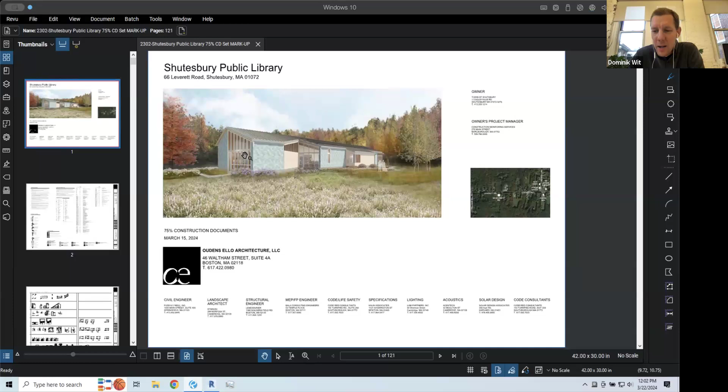Just to quickly update you, there has been some architectural progress since last Friday. So what I've rolled into this set is revisions, because it was a 75% set. I think what I have for you today is 80%. There's been some follow-up cleanup. Always as things get to that deadline, there's a few little oversights and cleanups. So I want to present to you a week's worth of revision, since that was 75%, at least for architectural.

That does include an updated rendering on this first page. So this now represents the intent to finish the building without the rafter tails. It's important that we represent the building correctly as things change. The front end of the code and ADA clearances has not changed.

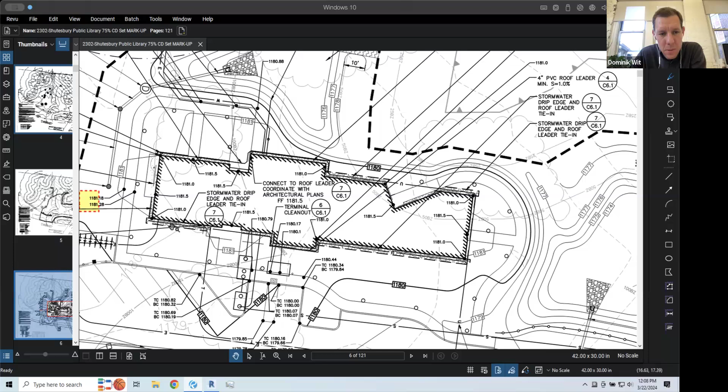So all of that is connecting to this - what is that? That's a drain hole, manhole. And then it goes into this catchment basin here.

Similarly, this upper catchment basin collects some of the water that's uphill and discharges here at this riprap. This is an overflow spillway in case anything here fails, so that's a fail-safe for this system. Similarly here, if anything fails within this, we have a spillway. Otherwise, we'll continue the stormwater collection into this lower basin.

Septic we can get to, we have specific drawings for that. This is a raised septic system.

If we go to utilities, we've got a duct bank that comes in, leads all the way to the transformer. We also have telecom data, currently shown going to the storage room. After last-minute coordination with Marianne and her IT consultant, we decided it might actually be easier to control wiring within the building if we get telecom coming into the director's office. So this is a portion of scope we're going to revise for the 100%.

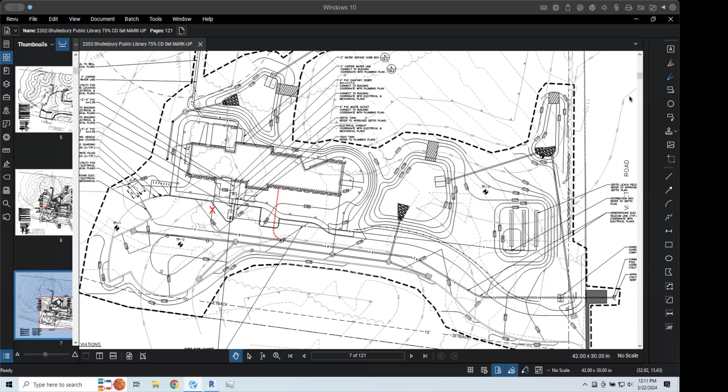I think it's a 2-inch, but I'm going to look while we're talking, let me follow up. I may be completely misquoting. All right, I'll look and then I'll chime in again. Neil at CMS recommended that we have an additional one, and I think that's appropriate, so you're ready in case you have additional needs in the future.

We're pushing on NGrid so that they can have their pricing for the overhead power lines, so that we can have that in hand when we evaluate the pricing for the 75%. So that's another kind of sidetrack happening while we're pricing the set related to utilities.

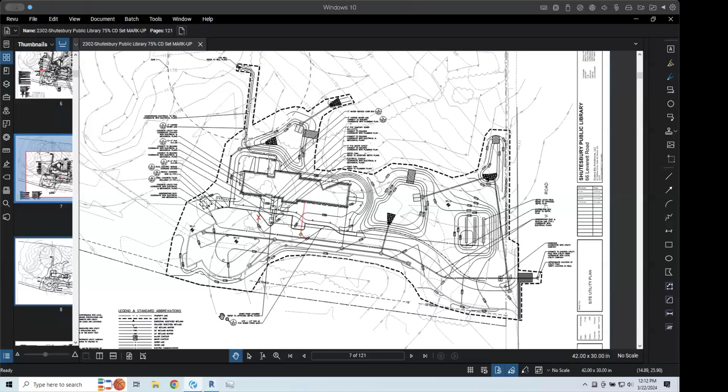So I just checked with Marianne again, and it is the broadband specifications from our broadband committee, Jeff and Stephen. It does say at least a 1-inch conduit, but that's for one cord. You have all the specifications I sent - if Jeff thinks a 2-inch conduit is better, that doesn't seem like it would be a huge price difference. So I'll make that change, Jeff, to a slightly bigger one - from your experience, let's do that, and we wouldn't want to be caught out with that. So I'll make sure to include that, that's great.

Moving on to pavement markings. This is a fairly simple plan that really just describes pavement markings and signage. All the lane markings and parking aisles are shown here, with arrows. Required signage just to help direct traffic around, that's required.

Accessible parking designations - we show two of the EV charging spots for this. I've asked, this didn't make it into the 75%, but I've asked that they omit that for the base bid. We don't need it, right, because we're going to be charging-ready. We don't need the signs yet, so I'm going to make sure they get taken off. Fairly straightforward on this one.

Moving ahead, so now we get into details. I didn't want to get too bogged down on these, I'm happy to answer questions for those who have them. One thing I'm going to ask Fuss and O'Neill about is this electric charging setup - we need to be charging-ready, right? So we do need this concrete pad, this is 2 feet deep.

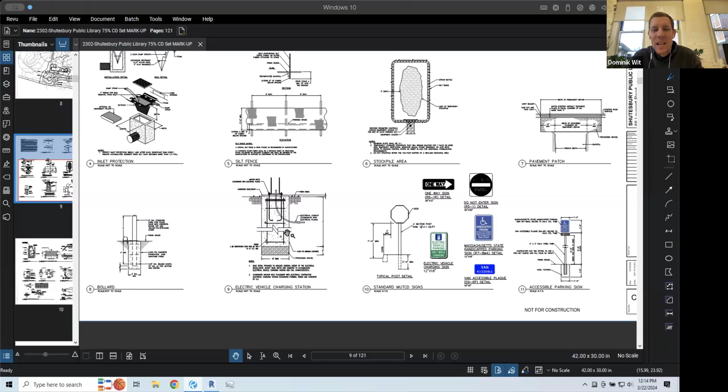On a previous job, we installed one about 5 years ago, and I'm trying to remember how deep we ended up having to go. I know there's frost heave considerations, but it's substantial. So this is one thing I want to flag - it's a lot of concrete there for a charging station. It very well could be over-engineered, but that's a personal question for me.

I'm going to reach out on that.

Pretty straightforward with everything else - spillway information, a lot of these catchment basins and other civil elements. Going into the landscape, there are also other landscape elements that we can go through as well.

Moving on then to the septic. So the leaching field again is as shown and coordinated. Sounds like everything is working well in the current location. Again, it's going to be about 7 feet tall if you stand on Leverett Road, so it's going to have a fair height to it. This will be seeded - we can go over the planting plan in the landscape.

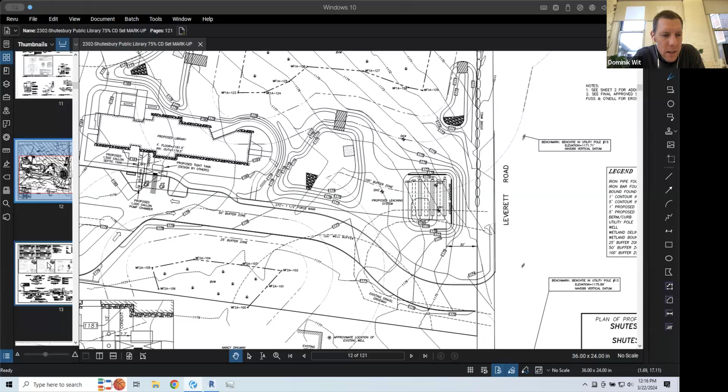This will be connected to the chambers up here, the septic tanks. We have 2 septic tanks - the septic tank and then the pump chamber.

We were struggling - there was a concerted coordination effort about where to locate these. I think they are shown more accurately in the civils, so that manhole access is properly located. The tight tank, which is plumbing not septic, needs to be in a location very close to this, unfortunately, and it has to do with elevation and drainage. We were hoping to move them upgrade, and that was problematic, so unfortunately they will have to be where they are. We are looking to conceal the access hatches within planting.

What is a tight tank? So a tight tank is basically a reservoir that will need to be maintained - you will need to have it serviced so that it's drained. It's basically catching water specifically from the mop sink, because that water is not allowed to go into the septic system. So the chemicals that you discharge in that mop sink are not allowed to go into the septic system.

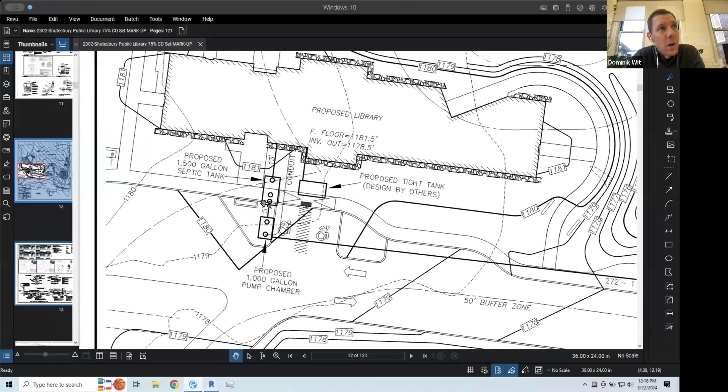So I haven't gotten any information on the maintenance requirements, like how often this reservoir will fill. I'm trying to remember, I had the dimensions of it - what you see here, it's actually cylindrical. I think there are details of that somewhere. Our plumbing engineer is actually still working on the exact size of that.

Okay, thank you. Yep. Can I interject real quick?

Sure. So Jeff, a lot of people at the lake have tight tanks. Basically it's just a reservoir - when it fills up to a certain level, there's an alarm that goes off, and then you get it pumped out. It's for when you can't have, at the lake, when you don't have the space for a drain field.

Okay, nice. Thanks, Stephen.

So we have the septic details here. We have some spacing plans for those elements, and then followed by details.

Looks like we are going to have a candy cane element in that raised septic, so it's something I want to discuss. Initially we had the septic field in the southwest portion of the site, and early on we were talking about how we might be able to disguise it. Now it's really front and center, and I'm just wondering - we do have some plantings in front of this, so I think that would be the strategy to help conceal this. But it's always that component of a septic leaching field - anybody who has one is familiar with it.

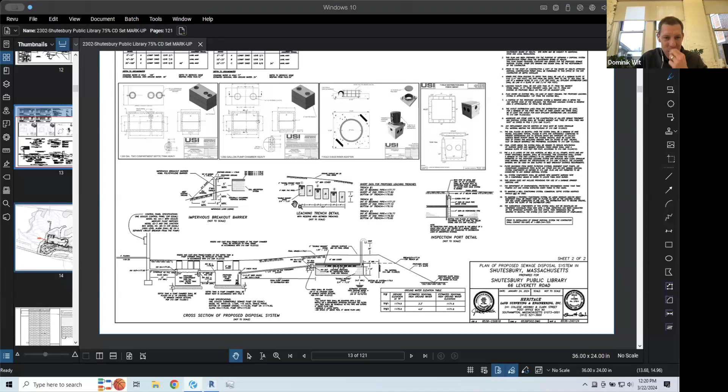All right, I'll talk to Fuss and O'Neill, and then Heritage, because obviously they would have a lot of insight on that as well. So thanks for that recommendation.

So moving to landscape - here we have our materials layout plan.

Nothing much has changed here. Again, the turnaround is revised now to meet the setback requirements. We do have overflow parking here.

One thing that slipped into this set that was new to me, and I'd like to potentially revise on a cost basis, is that we have a very low wood guardrail now. I don't know if anybody picked up on that. It's something I need to coordinate with Stimson. I'd like to do whatever is most cost beneficial. We did a similar strategy at the turnaround here where we would just use reclaimed boulders.

There's excavation going on the site, so whatever we find, we can have the contractor or the site contractor lay it out to help prevent vehicles from straying from the designated drive paths.

Similarly for this overflow parking, my sense looking at this is it's not going to be an insignificant amount of money as drawn. So it's not the same spec as what we had here originally. Originally here we had large foundations. I quickly looked at the detail, so just wanted to mention that. That's kind of on my radar.

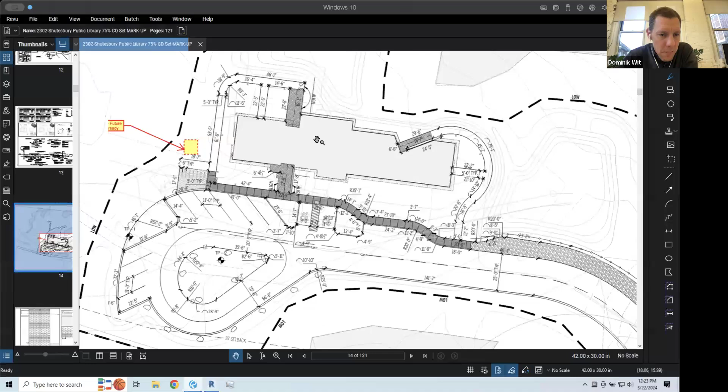So again, I think it depends on where we come in on the cost estimate. I know there was talk about potentially offsetting paving from donations, or we can reassess once the numbers come in. There are very easy areas and square footages that we can kind of subtract out of our estimate.

The next 2 drawings are actually detail plans. Stimson is looking at proposing a blend. We've used Hanover precast on other jobs, and with a blend you get a very nice layout for paving. So that is the detail here at the 3 locations. It's a good drawing to have to really hold the contractor to the installation and make sure they perform the layouts exactly as desired.

I've touched on some of this already. This is really the material plan, specific to how all the materials are laid out. So again, we do have Cape Cod berm now all the way across to meet this concrete sidewalk. Again, it's needed for stormwater. We'd love to omit it, but so that is there.

Then we do have concrete curbs across this. We have the 2 planting beds, and again, I'd mentioned the pathways previously.

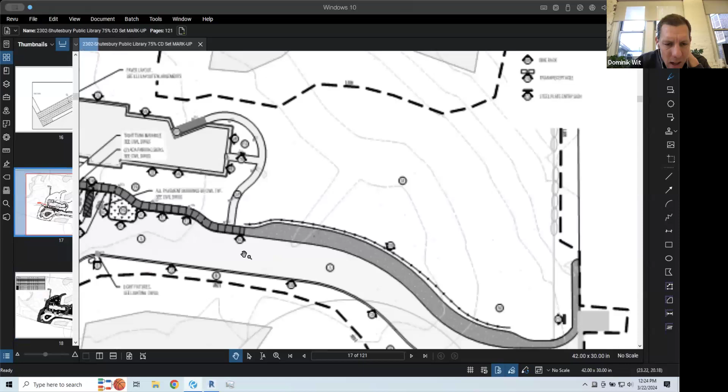Is this precast concrete or poured in place concrete curb? I believe it is precast. Okay, yep. I think that's what— is it RC? That's right. Raised curb, it'll be in the details. Yeah, I believe it is precast. Okay, yep.

The details show the various elevations as well of the precast curb. So we do need to come down to meet this ADA curb cut. So this will all be precast in there.

Now we're moving on to the planting plan. This has had a lot of back and forth and revision, and I think we've got this in a really good place now, with a very sensible strategy on the base bid for planting, and then the complete scope of planting to be carried out within the 3-year period.

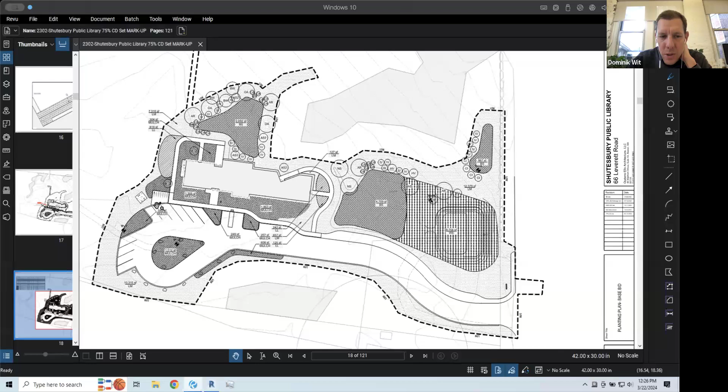So the strategy here was to make sure the whole site was finished in seeding or mulch, to ensure we don't have any exposed soil, and to make sure the site performs as designed for stormwater. Then the only plantings that will be made are the ones that are difficult to access after the site is finished. So on the next plan you can see the small shrubs and plants and trees. The shrubs are easy to plant by hand, but the larger trees aren't easily accessible from either Leverett or the entry drive and parking lot.

So the base bid has been pared down, and we're interested to see how that prices out. Again, these inaccessible areas will be the focus for the base bid. The 3-year plan and completion of the planting plan is then shown in this plan, which also includes the small plants and shrubs around the building in the garden bed. Yeah, so that's kind of a high level overview.

Then we get into the details. I won't stay with this long. One detail we still need to include is the drip strip that surrounds the building. The landscape architect would like to specify what the top gravel will be, and then civil owns the scope of the assembly beneath grade—all the different layers of drainage down to the drainage pipe. So that will be included for the 100%.

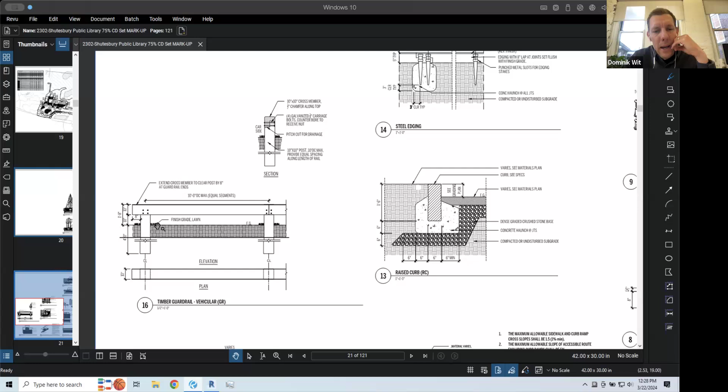Here we have all our various curb cuts, Cape Cod berm, boulders. So here you see the timber guardrail. It's definitely more simply detailed than the one that we had at the 50%, but I need to coordinate with them, and I'd like to omit it if we can. I'm hoping that setting boulders unifies the site plan and will help stop people from straying from that overflow parking.

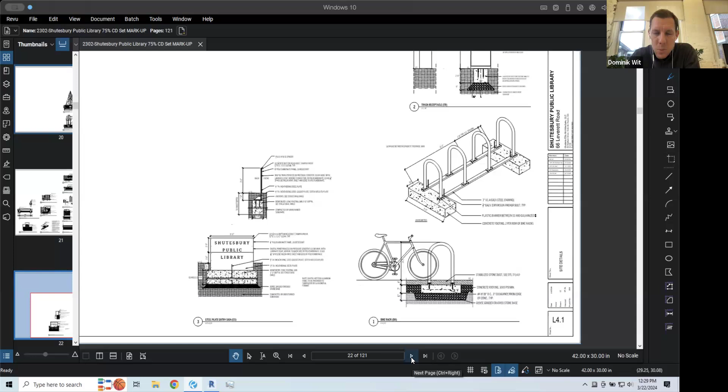Signage details, again, we're just owning scope here. We haven't really fully vetted fonts and what you even want the sign to say, but we are owning scope of work here. We'd like to unify the signage font strategy with this sign, what's happening inside the building signage itself, and this sign.

Moving to structural, kind of skim through this. There's a lot of specificity here, starting with foundations, foundation walls, and we also have a footing wall that carries through the spine of the building. How the structural walls will be framed - so we have some tall spans of studs, and these are LVLs, I believe, to meet that height, because we have a near 20-foot central wall. And then the shear walls will be sheathed in structural ply.

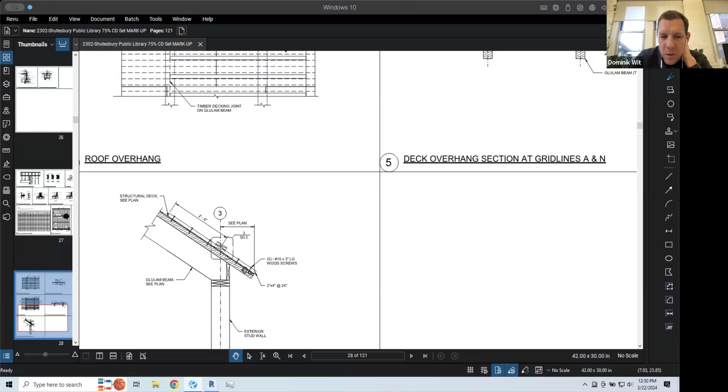So some roof details. We now have deleted the rafter tail. They're calling this a glulam beam. That rafter condition previously was protruding; now that we have reduced our eave, we're able to simplify this. We do have backspan 2x4s, which will be required just to reinforce that overhang and make sure that we meet snow loads and occupancy so that you can stand on that. It's a simple detail, but we think the fussiness is a result of where we ended up now with the new roof, and we see this as a cost saving actually.

So again, going through, we need some reinforcing structural chords around the building footprint on the roof. We have the foundation plan, and it shows some wall framing above that.

Depending on how we go with tile and whether we're going to include that, we would need to include a small depression, because it's thin set. I think we could get away with like 1.5 inches, could be less actually - I'm trying to remember exactly, but I'll coordinate that. If we do get tile, we will need to represent a slab depression in the entry lobby and circulation space.

Do we have any slab depressions for fin tube? No, those are trenches, not fin tube - it's for the electrical heat source at the meeting room. So we have 3 trenches - are they on that drawing? I couldn't find them, that still needs to be coordinated. They missed that, so we've got to include that.

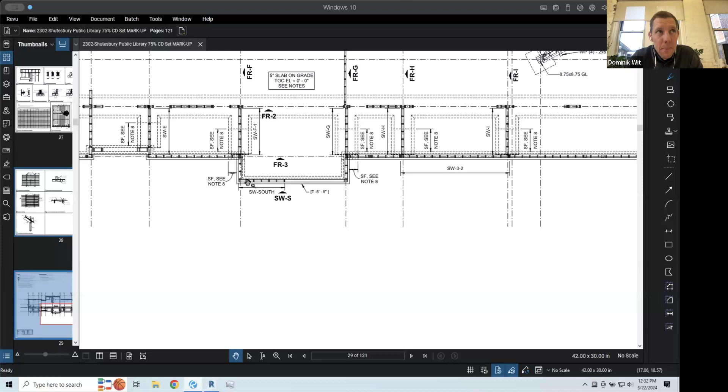We also, depending on where the tight tank goes, there may be a conflict of it being so close to this foundation wall. So I have asked that structural own currently an increased depth of this footing. If the footing is too high with the tight tank being adjacent, there's conflict between the two. So we may need to - at least we own that currently.

So are you going to step the footing down for the 75%, or are you going to move the tank? Well, I think the tank access hatch may end up in the pathway, in that adjacent concrete pathway, so we're reluctant to do that. It's a question we can pose to our cost estimator on that amount of concrete. Currently, we own step-down footing for the 75%, and we'll see how that plays out.

How far down are you stepping down? 18 inches. Okay, it's not a lot. It's called a zone of influence - I forget the term exactly. Basically, I think the tight tank will have some sort of pressure issue if they're too close together, and you need to drop that foundation further down so that you lower a zone of influence away from that tight tank.

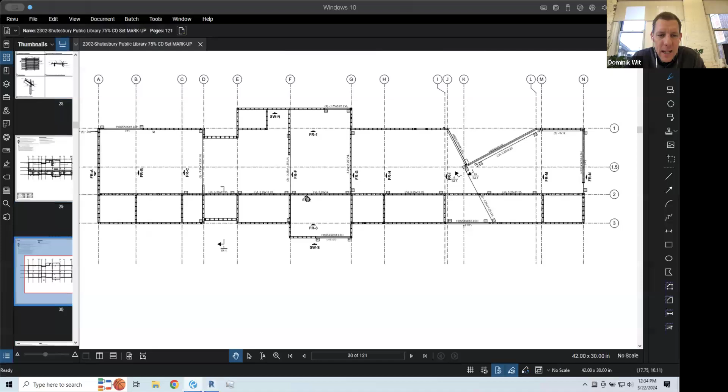So moving on, this is the header framing plan. Here you see the shear walls and the LVLs required to bridge openings, reinforce sliding doors, the security gate. So that's depicting that structural information, kind of at the 9-foot datum or thereabouts.

And then the next plan is the roof plan, so that describes the glulams and the upturned roof framing.

What we decided to do is, because we do not have the exposed rafter tails anymore, we thought it would be a cost-saving measure to revert back to 2x12 standard lumber to support this side of the roof. We're also going to LVLs, which is cheaper than glulam in this zone because you don't see any of it.

So we're really interested to see that savings. As you go through the stages of design, you're refining scope. So we're hoping this will help bring costs down. I think that was a smart choice, and we'll be interested to see how that plays out.

Nothing really has changed other than structurally what I've described to you. The essence of the building has remained the same for quite a while, other than the roof rafters framing has changed.

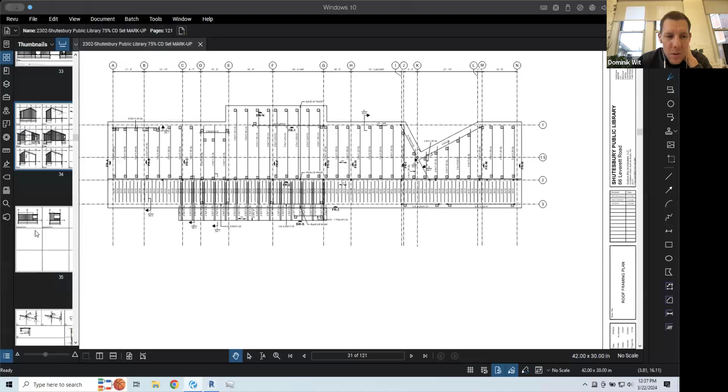This is at that main spine grid line 2, which runs north to south in plan, holding up the roof ridge across here. What we were hoping to do was center the roof ridge with the finished face of that wall, so that when you're at the north elevation standing outside the building looking into children's, you read the jamb and the roof ridge in line. This was a bit of gymnastics, but LeMessurier were able to work that out, so that's great.

We do have some steel tube that is required for window support. We owned some of that at 50%. There was 1 or 2 additional members with coordination with Pella, because we have ganged window systems due to wind loading. We needed some additional HSS steel tubes across window openings. If you scrutinize some of these elevations in structural drawings, you'll see those. You're also seeing attachment details to stud framing here.

All right, now to architectural. Again, I'll just try and highlight changes, and not a lot has changed here, right?

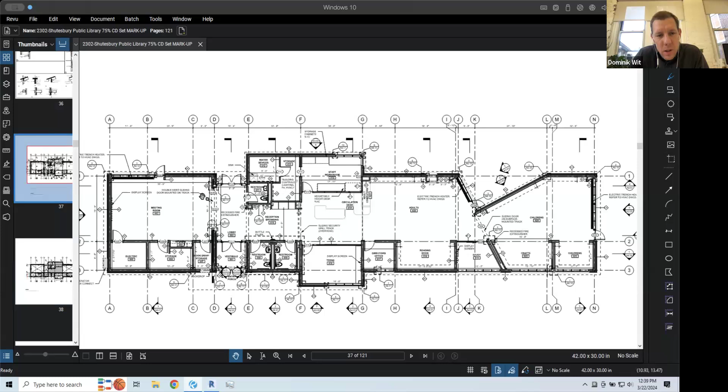Moving on to the attic plan, we felt—before I move on, we will include a slab plan. That's another drawing that the architectural drawing set will own, and that specifies exactly where we want the slab edge to be in relation to our architectural finishes. And with this, the trenches, obviously, and dropped slab if we need it for the tile.

So then moving up to the attic plan, we felt like this is a good drawing to have to really show these open spaces, describe that teens and study has a sloped ceiling, what spaces are open to the decking. It also helps describe some of these dropped soffit conditions and what the wall types should be in those cases.

The roof plan, nothing much has changed here. Again, we own the gutter at these two locations. We have a rain diverter at this location. And then we have two downspouts with a cricketed roof to drain to either side. PV is indicated here. And snow guards—we're going to own snow guards around the perimeter, not at the upturned roof, but yes everywhere else. And we want to also make sure to have a gutter cover at these two gutter locations.

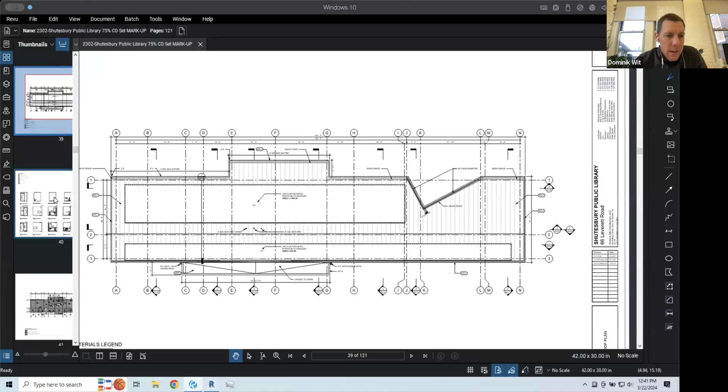Then we move into the restrooms. Pretty straightforward—we spec them to meet code and the requirements. We're missing a mirror here, so we already have that on our list. We've got to include that. We'll make sure the cost estimate includes that here for this additional restroom that we ended up including.

Floor finishes. We owned resilient flooring, but I made it clear in the cost estimate that we wanted to add alternates so that we could potentially have tile throughout. We're also pricing epoxy flooring for the restrooms if we were to go with linoleum. Other than that, we have linoleum throughout, a simple sealer and exposed concrete for the mechanical spaces. We have carpet in adults and the reading nook and the director's office. Everywhere else is resilient flooring. We have a carpet overlay in the children's.

Then the reflected ceiling plan. These fixtures are pendants, which we have as an add alt for the cost estimate. So we're interested to see what that would come out as, so we can evaluate that with the cost estimate.

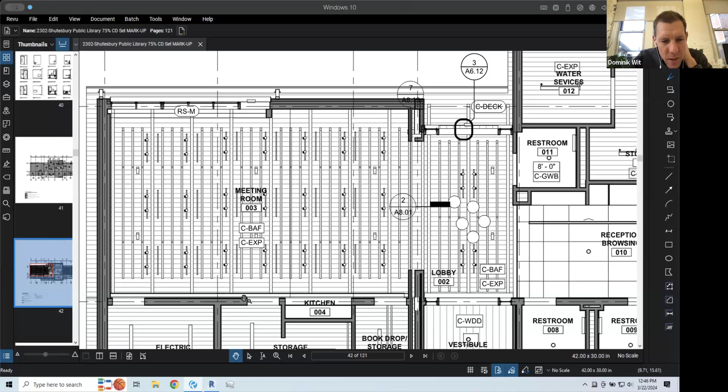Okay, so the intent again is to make sure this wall is illuminated, these side walls on either side of the screen, and then also this wall here.

That's also going to be wired in a way that can be controlled independently, right? So you have zoning that'll be zoned in the same way as I described, so you can specifically control the track heads or the fixture heads in those zones.

In the other rooms where we don't have ceilings, we have suspended linears, pretty simple, just to provide the lighting required. At the front entry, we're going to have fixtures mounted to the decking, but in between these two rafters. That'll be a nice resolution to installing the fixtures and providing light out here.

Then we have pretty simple fixtures mounted in acoustic ceiling tile. We have hard gypsum board for the ceilings in the restrooms. That's pretty common practice. Before I move on, another thing that we're going to coordinate is a few access panels.

We don't need them for most of the building because ACT panels can be lifted, but I do believe we will locate one in the vestibule and the restroom. I think we need one in each of these restrooms, depending on wiring to get to the storage room. That's a coordination effort currently underway.

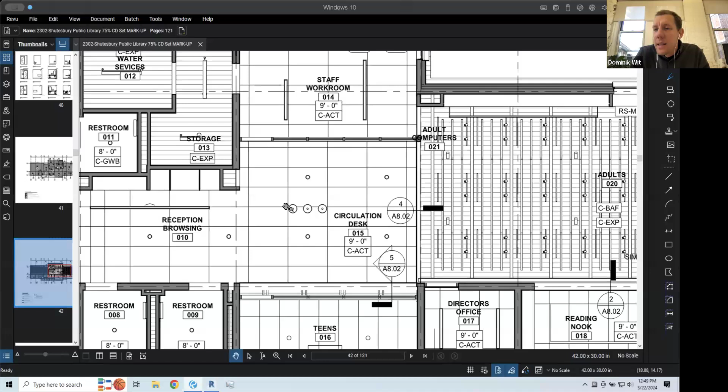Okay, and are those going to be spaced sufficiently to cover the whole desk? I've had a lot of circulation desks where there's dark spots and illumination issues, so I'm just sensitive to this one. Yeah, absolutely, I'll make a point to make sure Lamb is providing sufficient foot candles at that surface. Thank you. Yeah, no problem.

We also have, while we're in this area, a wall grazing linear recess in the ACT, and that's for the browsing and library area over here.

So that's the RCP in a nutshell. We're also describing finishes here. Acoustic ceiling tile throughout, open decking in the major spaces, and some smaller spaces don't have a ceiling, so it's open to decking, and the restrooms have hard ceilings.

Building elevations - again, nothing has really changed here, but we've tried to simplify things a little bit with the rafter tail. So we did have a vertical wood and horizontal wood component at the eave condition.

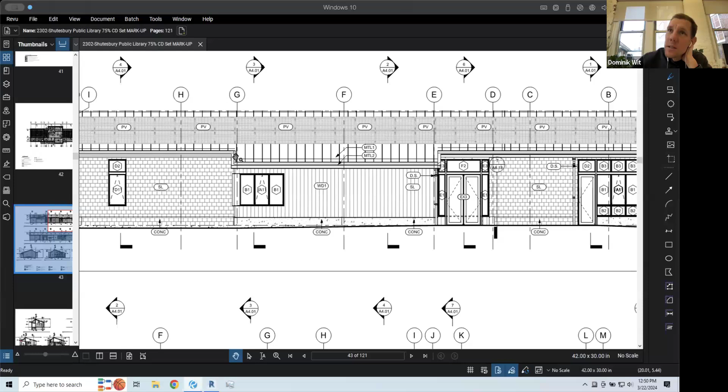Now we have a detail where the slate actually goes all the way up to the underside of decking, and the vertical boards go all the way up to the underside of the upturned roof, similarly at the staff workroom. We've simplified that detail, so we're hoping to see some savings there - it's a less fussy detail at the roof eave.

Other than that, material choices are the same - Alaskan yellow cedar with a pre-stain, pre-aging stain applied to it, so you get uniform aging over time, because the roof eave will create a shadow line. So you might have a lighter color above and a grayer tone - the graying out of the Alaskan yellow cedar will happen faster in the more exposed areas.

The same slate - the intent here is to use a light gray color for the metal trim that will tie in with the aluminum clad window frame, so you get a uniformity there.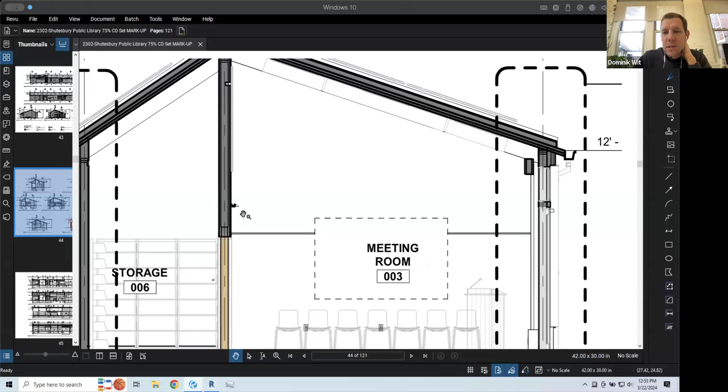We have a linear uplight - that was another lighting component in the RCP I did not explain before. The strategy is - let's go to the meeting room - the intent here is to have that indirect linear uplight, and that is in all the main spaces: adults, children's, and the meeting room. There's an indirect light strategy that lights the ceiling and bounces light in throughout the space that way.

And then above that, we're going to have supply air into the space. It's not shown in this section specifically, but we have a detail where we have supply air, the plenum, and the linear grille is above that. And then above that, we're going to have the acoustic panel. So we do describe some of that in these sections.

Then we get into the wall section specifically, where we need them - what are all the unique connections of different materials? These exterior wall sections break down where all these connections are, and then you can go to those specifically to get all of that information. I'm going to kind of just speed through these - I'm happy to answer questions.

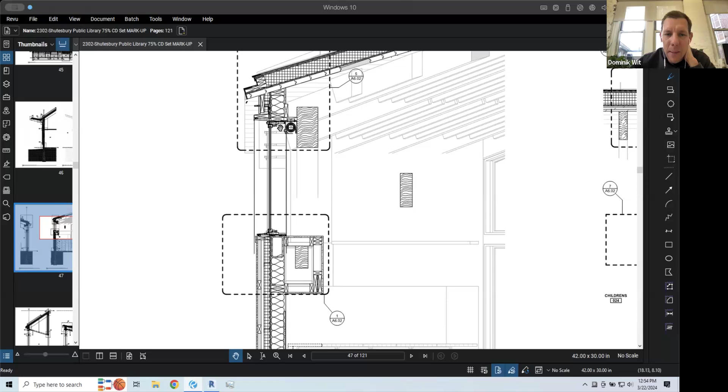Specifically here at Children's, we have the shelving niche, so we have an LVL to help support that overhead niche. We also have an HSS steel to support this window system above for the clerestory. We show shades as well - we're going to have all manual shades.

So one thing that we do need to coordinate in this one specific area is how that is going to be done manually - that is still a coordination effort. But on all west and east windows, we own manual shades.

So where do I find dimensions for a lot of this stuff? I go to the bigger details and they're not dimensioned either - as an example, lower right corner detail. Yes, I would have thought you'd at least give a dimension to, well, something. Yes, yes - so that we will own some dimensions, but the plan will dictate a lot of that.

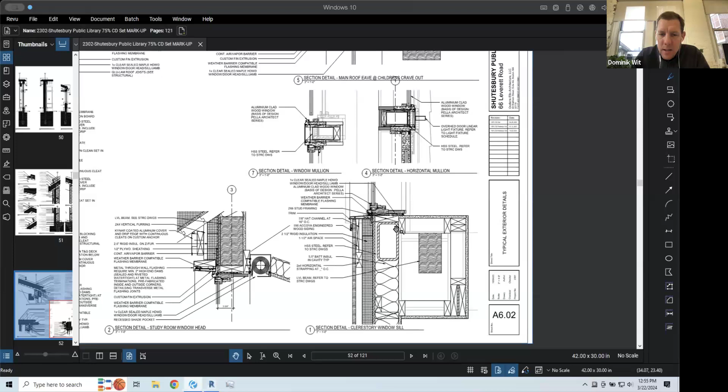And for instance, like the shade pocket, we specify the shade, and yes, there are some critical dimension strings, which is, you know, as a result of the 75%, we still got to kind of do our due diligence and get that stuff in.

While we're here, could you move up a little bit on that detail? There you go. And this kind of relates to the spec - all that metal work that's sitting at the edge of the roof. When I read through the specs, it implies that's Sarnaclad. But then when I look at another section of the specs, it's not Sarnaclad, it's bent aluminum.

So just go back to your specs and make sure everybody's understanding of who owns what. Yes, that's a good point, and there is a concerted effort to do that specifically, because we have our own spec writer, and then we have Garland, who's helping specifically with this spec, so between 75 and 100 we need a last concerted effort to make sure those two spec sections are talking to each other correctly. Thanks for bringing that up.

So that's kind of how the layout of the drawing set works - keying in the wall section to the specific detail.

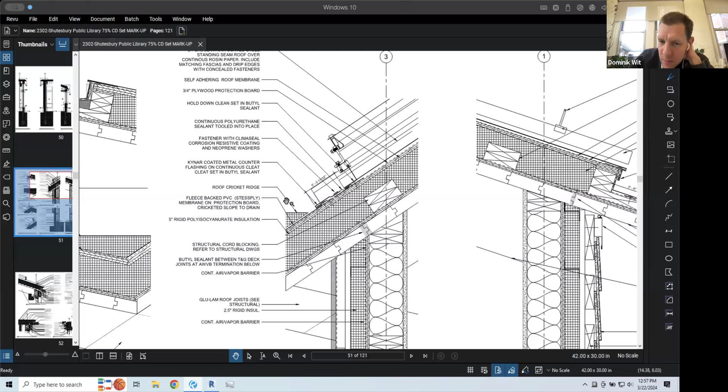And we have SGH reviewing this detail. We're still waiting to hear back from them. Good, because I don't understand that detail.

So this detail here was about making the standing seam metal roof independent of the PVC roof meeting it. And so we have flashing that stops at this location, and then we have the TPO that comes up to this location, with kind of an integrated connection detail with an exposed sealant bead across that. Why can't the TPO go up under the metal?

The motivation here was so that you do not need to disturb the standing seam metal roof at all. Yeah, but my point is, when it comes time to re-roof, they'll slice it there, and then they can patch the new TPO into just the old piece of TPO. I would still provide your fancy dancy detail, but a little belt and suspenders by taking the TPO further up under the metal. Talk it over with SGH.

As I know, I understand what you're saying there. The way I understand it is that the motivation was around warranty. We're going to have a 40-year warranty for the standing metal seam and a 30-year, which is maximum for this PVC. So if you're just cutting and rebonding to existing 30-year-old material, I don't know if that voids your 30-year warranty. That's my understanding of it. So yes, the superior detail is to have the PVC go all the way under the standing metal seam roof. That's how you would detail it.

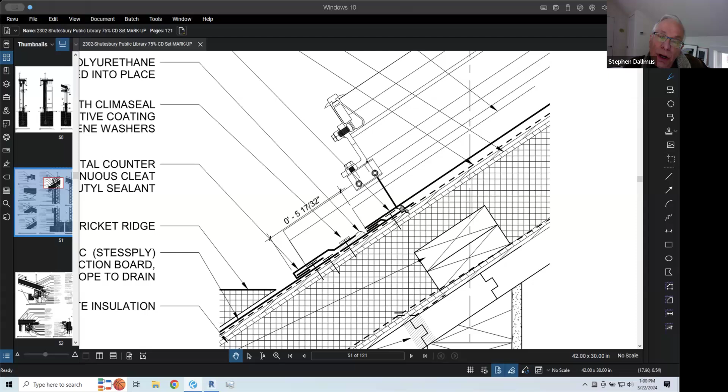Okay, Stephen? Well, going along with what Jeff talked about, if you kept that additional metal piece that starts under the metal roof, this comes down to where your essentially joint is with the TPO. If you had a piece of TPO under that went further up the metal roof, then you would never replace it. I mean, it's not subject to any weather. And it seems like it would be - Jeff and I talked about this a little bit - like another line of defense, if you will.

And then when you need to replace the TPO, you cut - that could even be two separate pieces. So you're just taking up what runs down into the upturned roof. You're never replacing the other piece. I understand.

So you're basically double layering there, so you have something to tie back into it, the 30-year replacement. Exactly, that's a good point, I'll ask that specifically. If the new replacement roof will then come with its own 30-year warranty, if that's allowed.

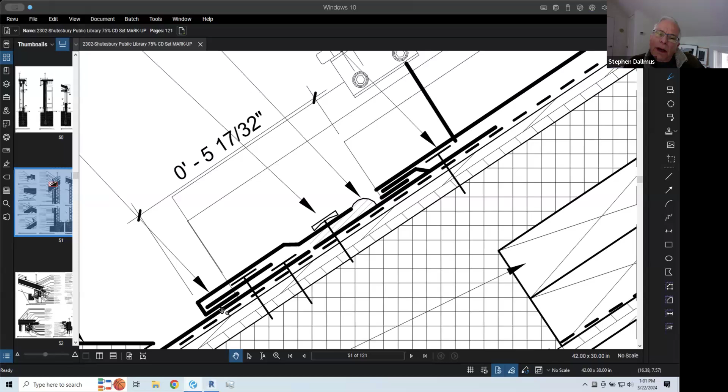On that connection, as I'm looking at the detail raised up, if you come up to where that bead of sealant is, and then look at the metal part under the standing seam metal, I see that if you start on top of the standing seam metal and come down towards the sealant, if something backs up, what keeps that a totally watertight joint? Because there's this thin dimensional line, right where your cursor is - this is the weak point.

You're saying, why doesn't that fold back over and interlock? It's the freeze-thaw kind of thing - maybe water somehow gets up a little bit, and I think that's part of the reason it makes sense to have additional TPO further up the roof in case that happens. Yeah, and again, we do have multiple layers of defense - this is also waterproofing down here.

Okay, let me just ask - when it says roof membrane, is that like an ice and water shield material? Yes. And then that's under the protection board - am I reading the detail right? It's on the protection board - on top. Okay, that makes more sense.

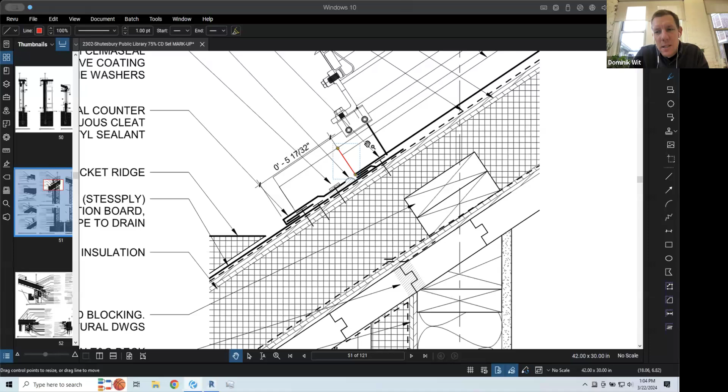That's the standing seam, Jeff. It is, but it should actually terminate here. Yeah, that's what's confusing me. What's it doing way out there? That's right - the model element of the roof needs to be pulled back to match this detail. Yeah, we generate all our drawings based off a 3D model.

And you need to learn how to use a pencil. Yes, back in the day I did once. You need to go back to the old days. I did drafting, I remember that - back in Australia, actually. Yeah, it's a good skill to have. When I started, we used Mylar. Oh, nice.

One last thing, Dominik - on A6.02 and A6.05, if you haven't picked it up already, you're still showing 7 inches of roof insulation, not 5. Yes, that's right, very good point, we did catch that and we've still got to review that. That's correct, it is drawn at 5, just to clarify.

So dimensionally, we have it - we've got to chase the notes and double check some of your details. You're still calling out for the burnt wood, or the Accoya wood, or whatever it's called. Yeah, Accoya, that's Accoya, right, there you go.

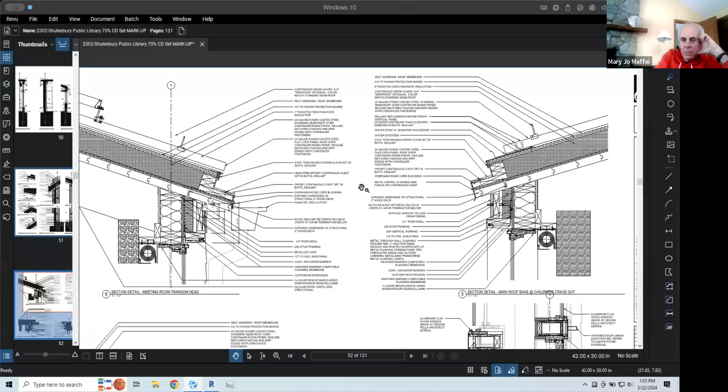Let's see here, just to kind of peruse if there's anything else you haven't seen. We would like to recess the shades in this study room and the teams room. This needs to drop down a little bit so that it's actually in line - right, so that's going to be flush here.

We have louvered air intake details, so there's 2 locations - I'll cover that when we go to the mechanicals. So for our mechanical system, we have intake air louver above the director's window, and then we have exhaust at the water service room. So we detail that - this was an attempt to detail the heat source at the children's window, but we're now going with trench throughout.

This fin tube is a hot water or steam system, and we don't have that - we don't want to pipe hot water and create a whole new system around this. So we're going to go with electric, which will be trenched in here. So that's going to be revised.

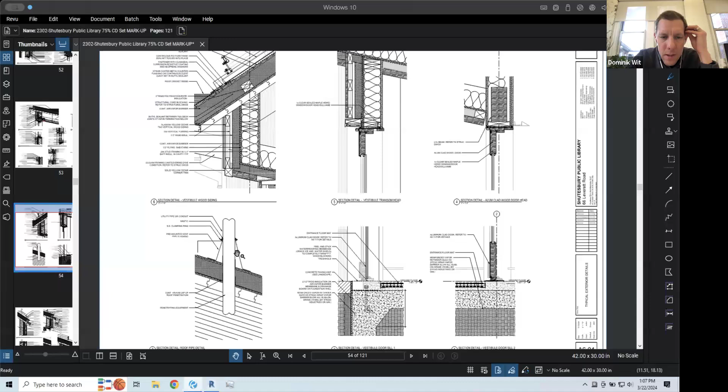We included the thickening of insulation at the vestibule, so now we have ample insulation. We are still working through - we have 3 vent pipe penetrations through the roof. We're revising this detail to adequately seal, to have an adequate boot around the penetration and the pipe, because the standing seam roof is undulating, it's not a flat surface. So just to take note of that, we're still working through that detail as well.

There are 3 rafter penetrations at the lobby exit. That's one location where we already have the glu-lam, and we still own this penetration. So we needed to incorporate that section there. Moving to the plan sections, we show specificity about how that gets sealed correctly as well.

Again, the slate is now going to be terminated up against the roof eave, so we have an aluminum cover that's going to hide that top course of nail heads.

Can I ask an intent question about that detail? Can you go back up to the bent metal above it? Is this one piece of metal, or two pieces of metal, and where's the cleats?

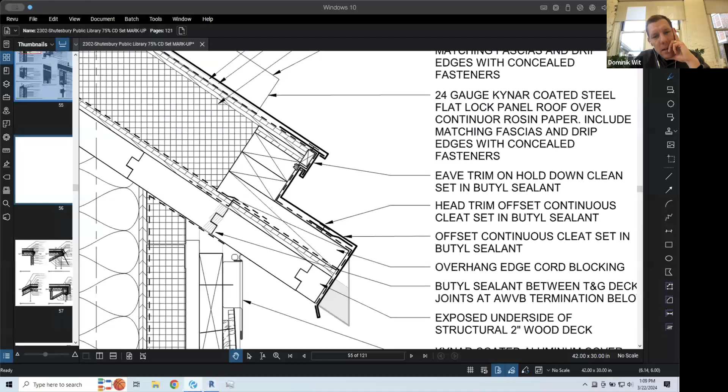So this is one piece of metal that acts as a cleat for this piece, which is then -- we need to incorporate. This is a cleat for this piece. Where's the need a cleat? Cleat down here. You need a cleat down by the bottom. That's right, that's my point.

So is it two pieces of metal? We can omit this cleat and put it down here instead, basically, because it's turning. All right, got it.

So the slate shingle coursing will start at grade and work its way up to the roof. They pilot-hole the nail holes, and then they're simply nailed in, and that top course, we want to conceal that nail.

Dominic -- yeah, it's Roger. Can we go back to the edge detail there? Are there going to be horizontal joints that need to have folded seams or such on these bent metal pieces?

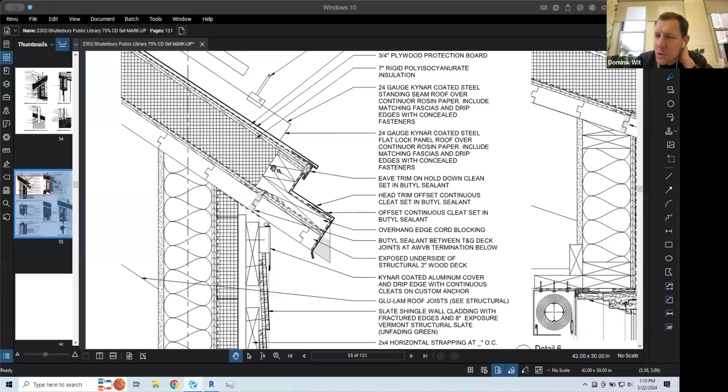Horizontal seams -- you're talking in elevation? Yeah, as you look at the length of these, what's the length of these pieces going to be, and will there be joints where you need an overlap and expansion joints, such as splices? We tend not to detail them in the elevation.

But we do have a comprehensive -- well, I'm trying to think. We have through-wall flashing, so we have specific details about how through-wall flashing joints need to be made. These, I think, are simply overlapped.

Oh my God, what do you mean the overlap? What do you mean by that? So they come in standard lengths -- if you're looking in elevation, this one piece is not going to be able to run 150.

Well, there's no roof that runs that long, but whatever the length is, I forget what the standard length is. My sense is they could break that up, like 12-foot segments. Yeah, right.

And what I guess Roger's asking is, is there a detail to capture the overlap requirement? Yeah, I think Roger's asking a good question, because we just had this problem at the elementary school where they didn't sufficiently overlap, and now...

Well, also, they ended up pop-riveting every section together, and it found its own expansion joint and created it -- in not a good way.

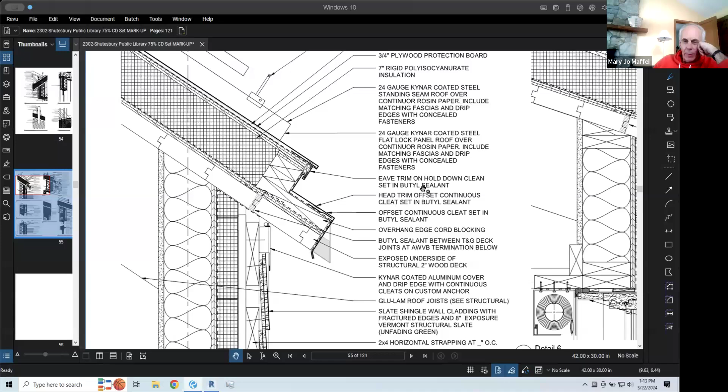I've never had that be an issue on other jobs where we detailed these, but it's good to own this stuff prior, and then there's no questions after. Yeah, that way Stephen won't get all over you. Keeping me honest.

Yeah, so thanks, Roger. I'll look into that and make sure we include that in the set as well.

Then the plan sections, again detailing, for instance, there's the Alaskan yellow cedar vertical boards. We want to own a vertical corner trim. This allows the vertical corner to be finished well, so if there's any expansion or contraction on these side boards, you own a better detail at that corner.

Yeah, standard connections throughout. Can you go back a sheet? No, go back to a section. Well, the wall section -- keep going. One more, yeah, let's see.

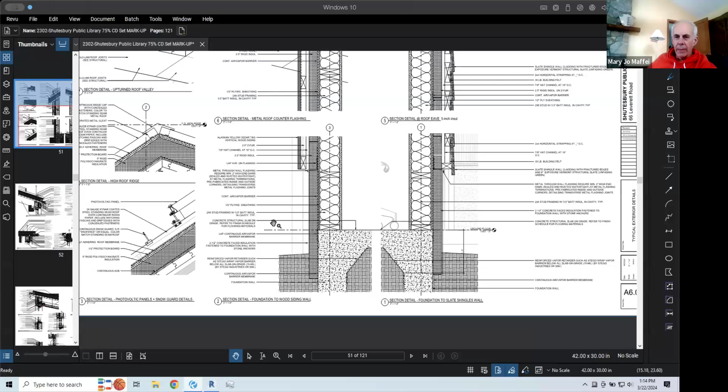What I want to do is see the bottom of the wall. What sheet would have that? At the slab. Well, you've got some blocking near the slab, but I don't understand how you're supporting the blocking. Okay, this detail on the right -- blow up that.

So you've got your slate on the outside, which is then sitting on...

I touched the screen and it got small. Oh, I see, I think it's me. I'm using my wife's computer and I don't know how to use it. Do you want me to zoom in? Yeah.

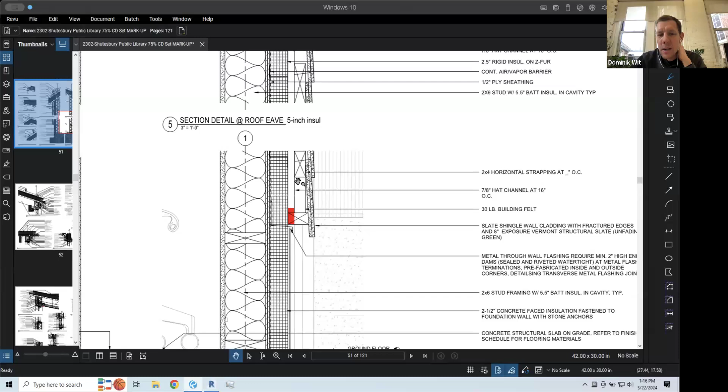So the start to finish assembly of the slate. We have a hat channel here, but there's a piece of wood at the very bottom, this one, horizontal. What's it attached to? I think this should be attached to the hat channel, so this hat channel needs to come down and pick it up. Yeah, exactly, like this. And then it can sit on top the way these are.

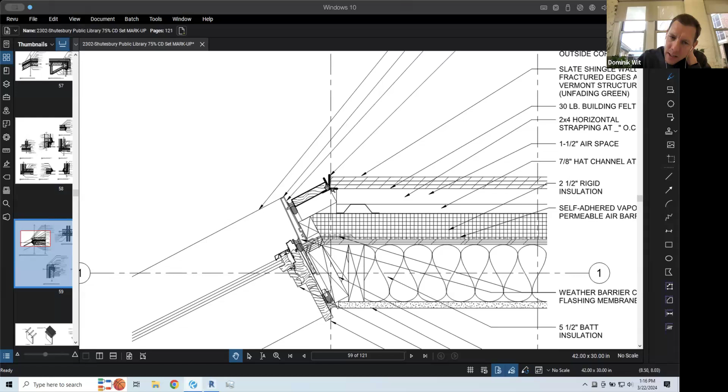So kind of standard connections. There's a few connections we still need to include, like 90-degree slate, slate to slate. So similar to this wood detail, what are we doing at the slate? It's going to be similar to this. We've done it on previous jobs where we have this heavy gauge brake metal that gets installed on the 2x, and it allows the slate to terminate. This is a connection at the building notch where there's a children's room, where we have slate and then go to the cedar. It's a way of creating a nice clean edge. So we need to do the same. Here's that condition, slate to slate.

I also wanted to mention that we have an offset fin. Because we have expansive window assemblies, Pella is not recommending that the fin be clipped into the actual mullion, and that it is independent. That way you can control and get a more rigid fin at the larger lengths of window assemblies. So we use that throughout so you have that same relationship.

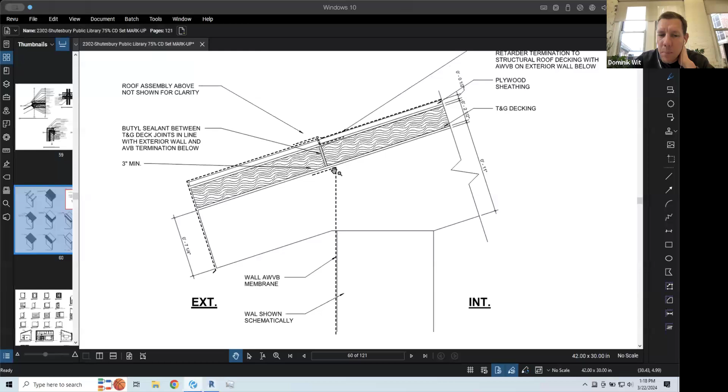The next sheet here is an assembly sequencing diagram, and it's to explain what we need to do to seal the structural tongue and groove decking. So the exterior wall framing and sheathing goes up to decking and is then wrapped in AWVB, air water vapor barrier, and that then turns up against the decking. The decking has tongue and groove gaps, and that needs to be filled with butyl sealant, which then needs to meet the roof water vapor barrier as well.

So you can see here in the sequencing, we explain that after framing, the decking needs to stop at that exterior wall. You need to apply the butyl sealant at that location and then continue the assembly. Then comes the structural sheathing, which goes on top before the first layer of AVB, and that laps down on the decking board. Then the next sheathing layer goes on with the AVB on top of that, and that basically explains to the contractor how that connection is made.

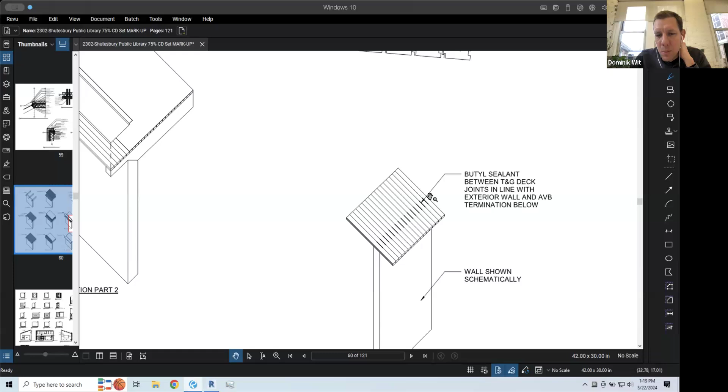We also have perpendicular conditions where the decking is perpendicular to the exterior wall, on the south and north exterior walls, and we explain that we need butyl sealant between each board at that location. That's to prevent airflow coming into the building, which makes for more efficient treatment of air and more efficient use of your mechanical equipment.

Interior elevations, I'll kind of skim through them. In the meeting room, again, we have the acoustic tiles, the fabric wrapped acoustic panels applied to the walls. This elevation needs to be revised so that it is cut right at that wall, because the section cut producing this elevation is showing it a little lower, when really the acoustic panel is offset from that structure.

Stephen, I see your hand up. Yeah, real quick thing, in the meeting room I see the picture rail. I would suggest including that on the north wall, each side of the large pocket door, and then on the east side left of the kitchen, depending on what kind of items are being displayed, those spaces, even though small, would be useful. So really it's on every wall around other than the screen. Yes, great, thank you.

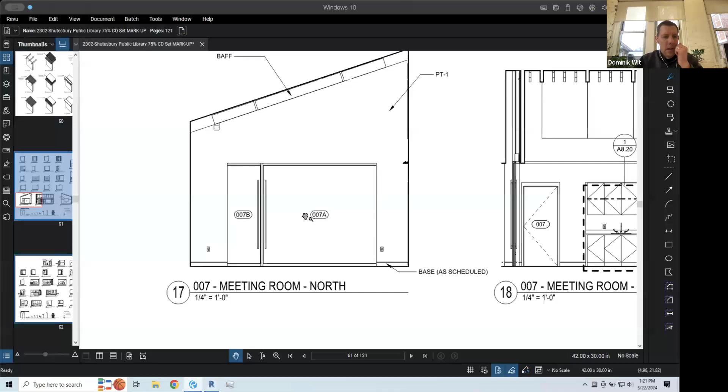Everything's pretty straightforward. I know we've gone through the staff workroom and the library of things wall. Everything else is pretty straightforward.

Then we have interior details. This is our trench heating supply for those 3 locations. So we need to coordinate this with structural, just to make sure that the slab incorporates this trench.

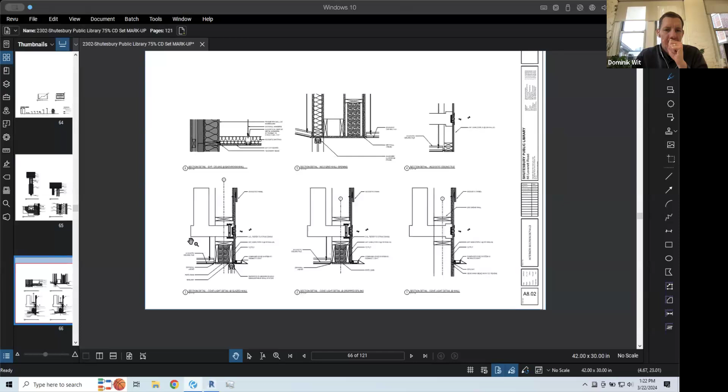We're showing connections again of the interior glazing. This is a condition at the teens room, where we have the circulation space outboard. We have the glazing connection to framing, and then the upturned ACT.

We're showing sections of the air supply at a few different locations. So we have linear diffusers, and we're showing the relationship of that through the framing, various elements, and then the acoustic panel above.

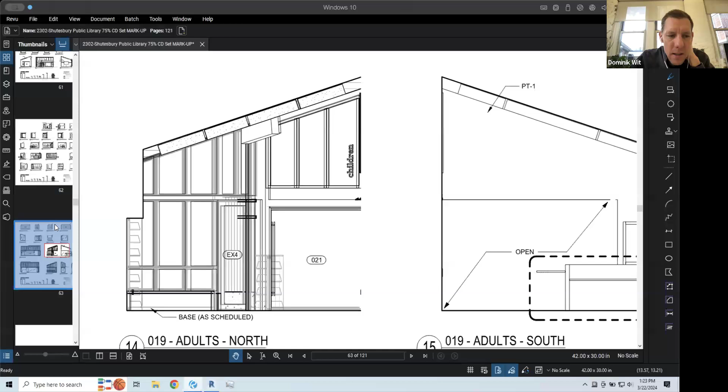We're still in progress of supplying all the details of the sliding doors. This is between adults and children's, the clerestory condition above. We have fixed glazing to create an acoustical barrier between adults and children. So if you're standing in the adults' room and looking to children's, above that is this overhead glazing. We're showing sections through that, how that meets the jamb elements. We've incorporated details of that system, the interior glazing and the doors. We have a sliding door at the study room.

We show a full page of our security screen. This is the after hours security screen. We're showing all the details there for that. Double track, so that you can have a smaller pocket to stow away the security screen, the mesh fence.

Sliding door details are also on this sheet. Again, just working through all the details, make sure we have the scope covered.

Kitchenette, we've gone over in previous meetings, so not much has changed here. Just some final revisions and coordination required here. The microwave will need its own support here, so we need that as well. That'll still be incorporated here.

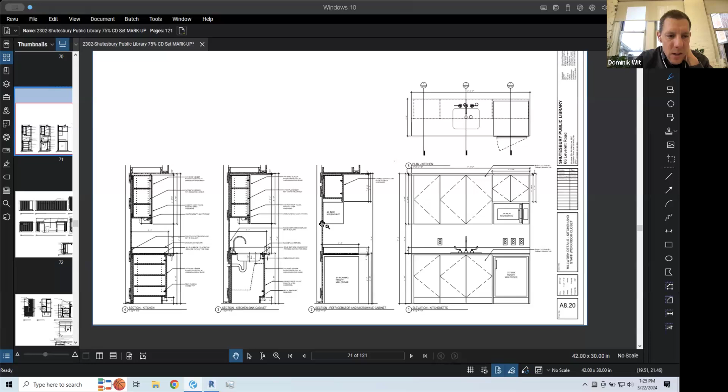Oops, I've got to use my trackpad. My Zoom is going to be horrible. Howard, no, it doesn't like that.

Again, all this millwork we've gone over. I'll fly through this. Some details of shelving between the staff workroom and the circ desk.

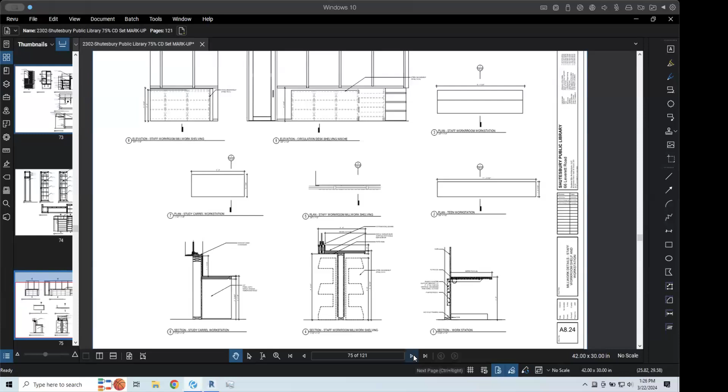Some wall assembly details. There'll be some final coordination there. Make sure that all the scope is as required.

Signage. So we started to incorporate some scope. There's some coordination required here with Marianne, just confirming where we have signage. Again, we're including that here.

Before I go on, I might actually get my spare mouse real quick. Do you mind? Give me like 1 minute. It'll just be easier for everybody if I can actually operate this thing properly. Hang on.

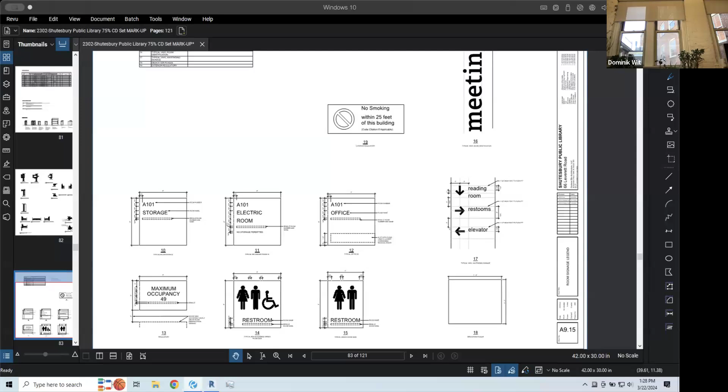Dominik, I have something about the bathroom signs. Could they not be gendered? I think the trend is to go to just showing like a toilet or what's in the facility instead of showing this, because even having the picture of the man and the woman is not inclusive.

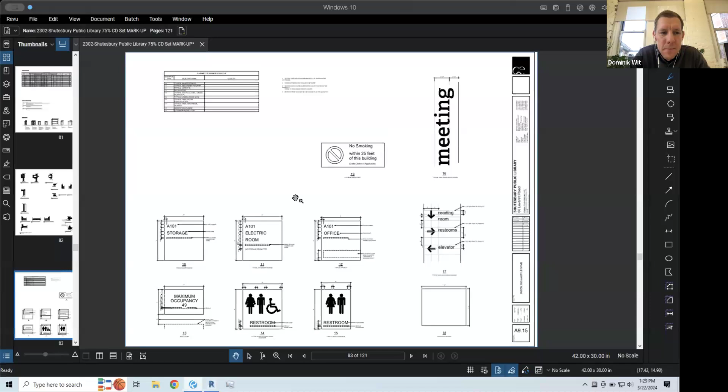You're muted, Dominik. Sorry about that. Yes, we will. And sorry, you might have seen I was busy taking a note. I absolutely agree. We can change that icon for a gender neutral restroom. Thank you. Yeah, no problem. Sorry for the short delay there. Of course, my mouse died.

So yeah, we are working through the signage schedule and making sure that we have that. It's still a work in progress. There are a few wayfinding signs.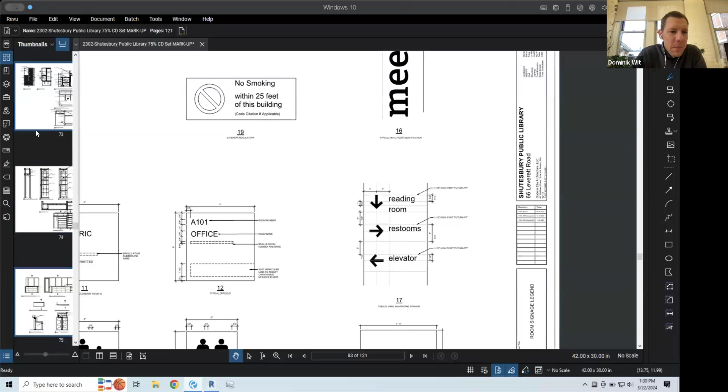Because it's a small building, there's not a lot of requirement for wayfinding signage. But for instance, the major spaces, the meeting room will have its own sign. All of the main public spaces will have their own signs for wayfinding. We decided to incorporate wayfinding signage at the entry from the lobby.

So the meeting room, for instance, will have its own sign. When you enter through the vestibule to the left here and look at the meeting room, it'll have its own sign there. When you turn to the right, you will then look at browsing in the library of things to your left here. The restrooms are to your right if you go through this opening. We wanted to just indicate what spaces you can get to further ahead.

So the wayfinding signage is explaining that, which is different to code related signage. And for the code signage, each space needs its own sign next to the entry door, needs to have Braille, room number. So we're capturing that scope here.

So we incorporate some plans on those locations. This is the furniture, the FF&E plan, which isn't necessarily a contractor document, but more of a coordination plan. So we include that as well.

Moving on to mechanical, I'll go straight to the larger scale plans for MEP, and I'm happy to answer more questions about specificity. Most of the equipment will be held in the plenum or attic space in the center of the building, above the circulation area. All of this equipment will be hung, and all access and maintenance requirements are being coordinated around the acoustic ceiling tiles.

We're making sure you can get to filters and things like that easily by simply removing acoustic ceiling tiles. We have intake air above the director's office, exhaust air outside above the water service room, and the ERVs are these two large units in the middle.

Supply air throughout the building is really going to run across the plenum space on this side. For the meeting room, supply air will be on this side, served through a linear diffuser. We have supply air for the lobby coming in from an overhead linear over here. I'm still trying to work out exactly the need for this air supply on this side, since we have linear supply on this wall for both adults and children's areas.

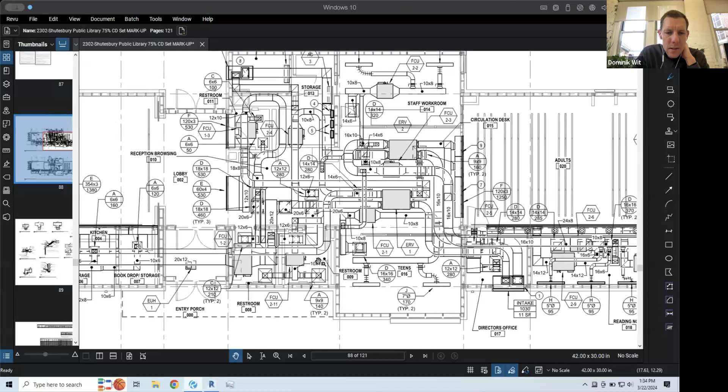Supply will be near the windows, and the director's office the same, and teens the same. So all these independent spaces have their own supply and return. I think the only AC we have is in the water service room—it's one of those wall-mounted air conditioning units at the water service and electrical room here.

Question: when I look at the meeting room, the air handling unit itself is sitting pretty far back downstream. I'm concerned that's going to take a lot of fan power—is it going to transfer noise into that meeting room? You've got to throw the air a long way across that room.

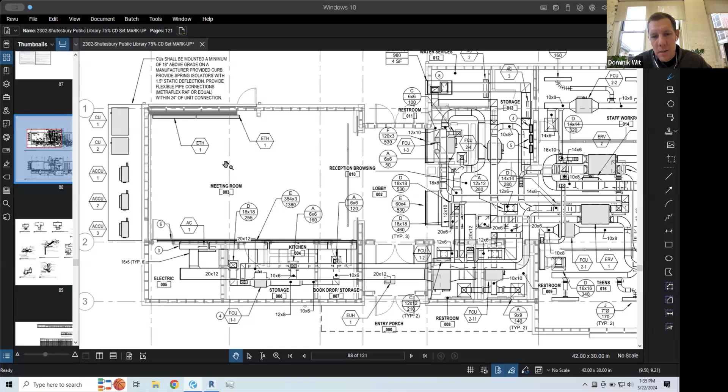Our acoustical consultant is reviewing the 75% set. We're doing this last minute since it now incorporates a lot of detail the acoustical consultant is reviewing, so we have another coordination effort with them and the mechanical engineers. That's a good question, I'll bring it up with them.

And then we have—excuse me, Dominik, go ahead. Sure, couple questions. In the main spaces like the meeting room, the adults, and the children's areas, are there any returns high up on the wall? No, the returns will all be at 9 foot in the ACT panels.

So the reading nook is going to have the return, with supply across that linear, which is at about 9 foot. My question then is, in the summer, if you're doing some cooling, are you taking the heat from those spaces?

Because of convection currents, heat wants to go up—so the heat at the very top, how is that being returned? I'll ask that question, I'm sure there's some sort of strategy with the airflow.

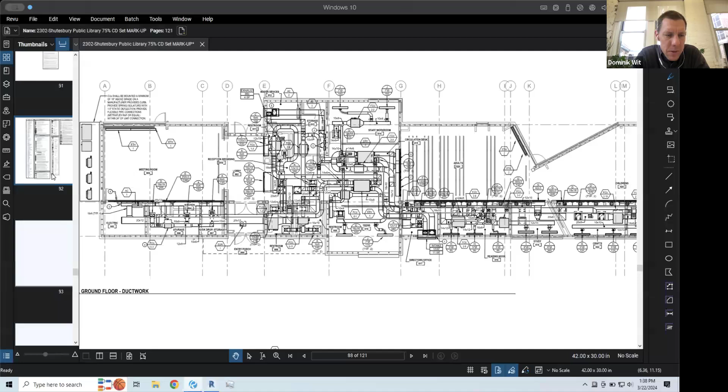Next is electrical. This is the electrical site plan. Again, we've got the duct bank, telecom, and electrical coming in. We're going to revise the telecom turning to the director's office. Electrical goes to the transformer and then into the electrical room. We're showing the concrete pad here for future energy storage, so we do have it in electrical, but we need to coordinate with civil.

And then we have parking lot light poles shown in the plan, and bollards. Is there a pole box at each one of these light poles? Yes, there will need to be, yeah.

HH is the handholes. I have an outstanding question with them on the electrical duct bank. There doesn't seem to be a handhole anywhere along the length. There needs to be one at least in the middle. Yeah, you would think so. So I have that outstanding.

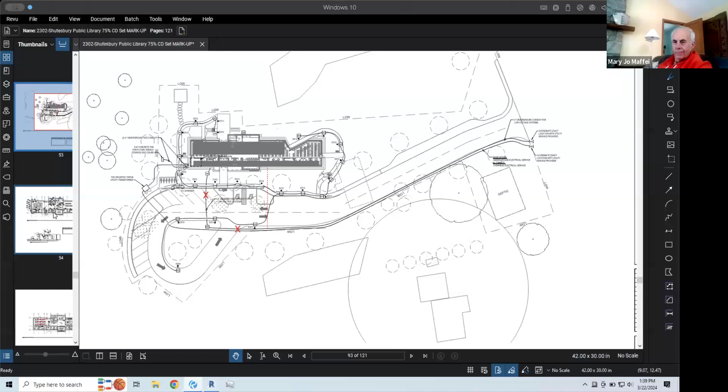One scope that's coming to mind is security cameras. That's another thing I want to make sure of, because I know we wanted to mount one on a pole in the parking lot. So I've got to make sure that we've got that.

There was also a last minute coordination effort with Mary Jo and technology with this plan, so that didn't make it into the 75%. I think we reduced some of the scope, so we'll make sure we pull that out for the cost estimate. But generally the floor boxes and outlets have all been coordinated with Mary Jo and the library team.

Moving on to the lighting plan, I did mention again that the way this is being represented, in actuality half of the track heads are going to be mounted on the other side. We need those tracks to afford us the ability to light properly.

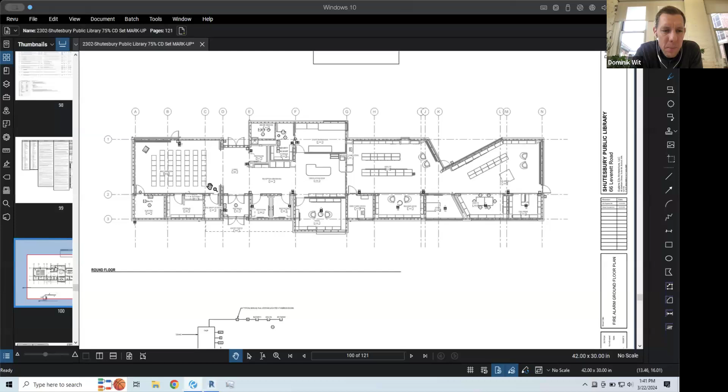And then schedules. Moving on to the fire alarm, I want to review this. This is the first time I see this from our coordination effort, so I just want to get a good sense of what we have here from our engineers, and I'll get back to you.

My understanding is that we have a fairly simple fire alarm, just to meet the fire chief's request. These are the horn strobes? Yes. And we're going to have a control panel in the storage room.

Then on to plumbing, I'll go straight to the plumbing plans. Really the added scope here was for the additional restroom. We also incorporated a new spigot to the north side. This water line is going to be run in the plenum space overhead to that location. We have one spigot here and here.

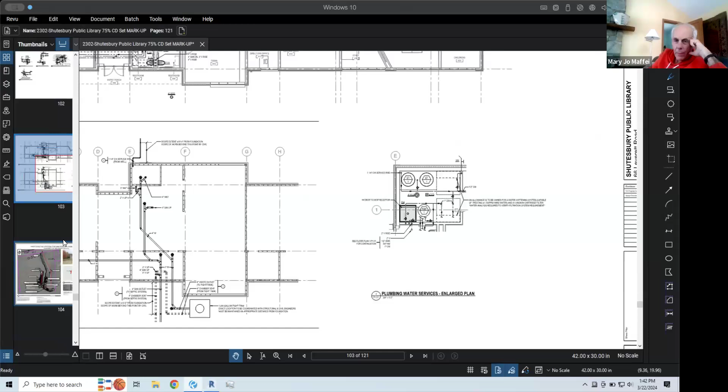We have the water room laid out. So again, once the well drilling and we get the final water testing information, we can lock this in. Hopefully you can get a person in there. Yes.

Then PV is the last. We have our output per year, which meets the demand of the systems that we have in the building.

There's a lot of information here about layout, and then all the technical infrastructure required for it. This plan is showing some penetrations and then the wiring. There is a section showing this connection to this system on this side, so there will be an exposed conduit line running from the electrical room through the meeting room structural bay. It'll be mounted on the deck, so it'll be fairly inconspicuous. And then real specifics on the wiring at each of the panels.

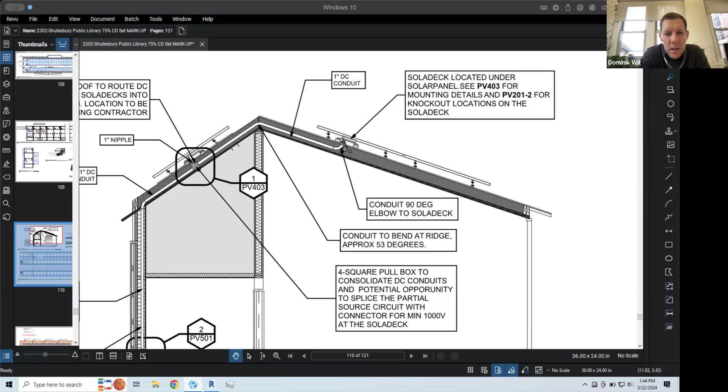This is the section showing the supply to those systems, so this will be a conduit that we will expose in the meeting room.

Then we have layouts and attachments to the standing seam roof, so how that all lays out, specific attachment to our roof system. We're calling out the garland roof, the seam profile, so this works exactly to the roof we're specifying.

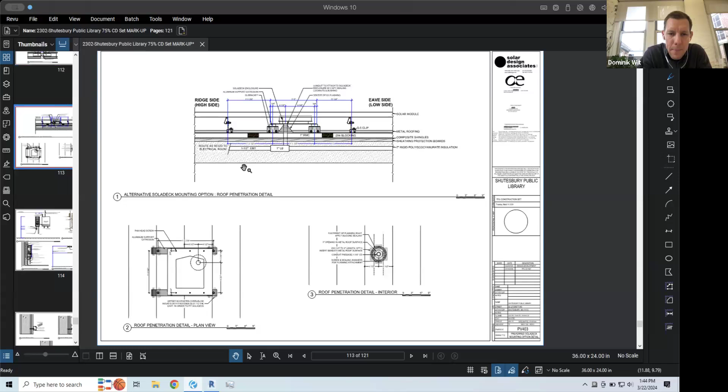And then this is a section detail showing the roof, the connection to the roof, and the penetration through the roof. We've got in our architecturals, we're going to own the waterproofing for this.

And then panel layouts in the electrical room, some connection details, hanging details, and then also the metering on the exterior. We're trying to get all our electrical metering on the south elevation of the plan, and we're hoping we can do so.

We're yet to see if we can get the generator hookup, the roll-up generator hookup, all the metering and electrical cabinets on this side. We are tight for space because we have the condensing units out here as well, kind of holding to that line right here. We'd like to not mount anything on this side, so that's another coordination effort.

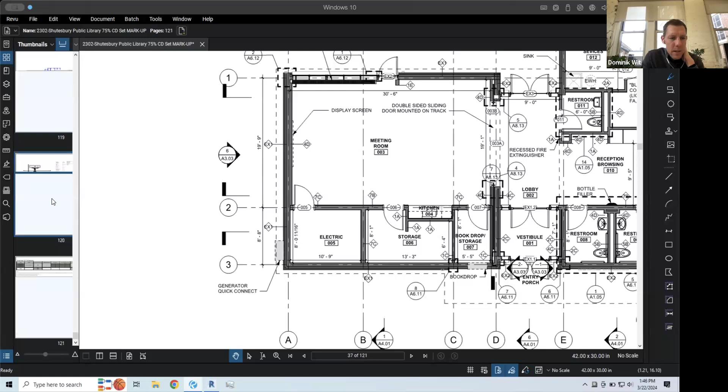That's really the drawings. Jeff, I know you had some spec questions, one of which was about the metal panel, making sure that we have the correct specs between our metal. Who owns it?

Section 071100, bituminous damp proofing. I don't know the answer to this, but do we need bituminous damp proofing if we're slab on grade?

I think we do, yeah. It's either for the finished materials on the slab. I'll get back to you on that.

Okay, and then section 072100 thermal insulation. You didn't seem to pick up the rigid insulation on the outside of the building. They got the rigid under the slab, but not on the side. Okay, I'll double check that.

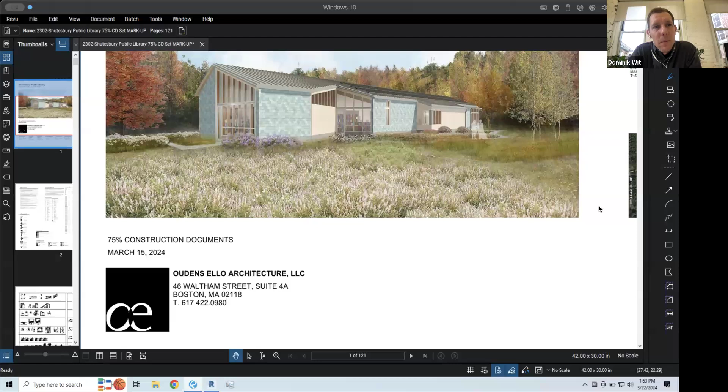That's kind of the next step for the committee, for me and the committee. So maybe I coordinate through Marianne. You're talking about the full library building committee, and of course everybody will have opinions about the finishes.

There's a meeting scheduled on April 10th to review the cost estimate. Do you want it before that or after? I think before. So I'll email everybody when I'm at a full computer and come up with a couple of dates. We had a hard time coming up with April 10th as a date everybody could meet, but I'll throw it out there and see what works.

April 11th? Or could that be a really long meeting? I don't need a longer meeting on April 10th. Are you free the 11th?

During the day, I'd like this to be in person, sharing actual materials. I'd like to meet you in person. That evening I'm not free, so it would be difficult for me. Let me email the committee, because it's going to be too hard to try and coordinate this otherwise.